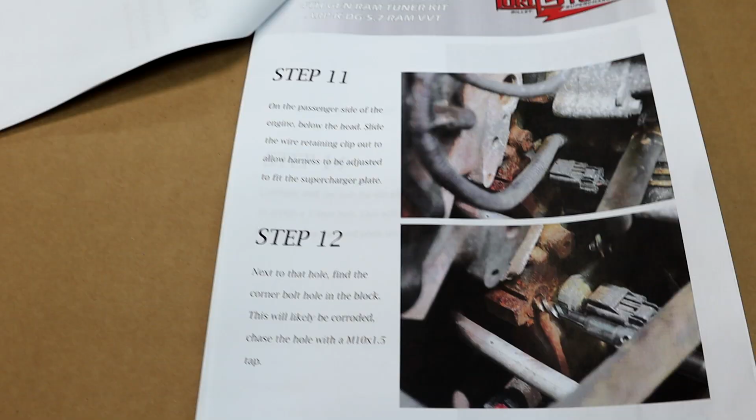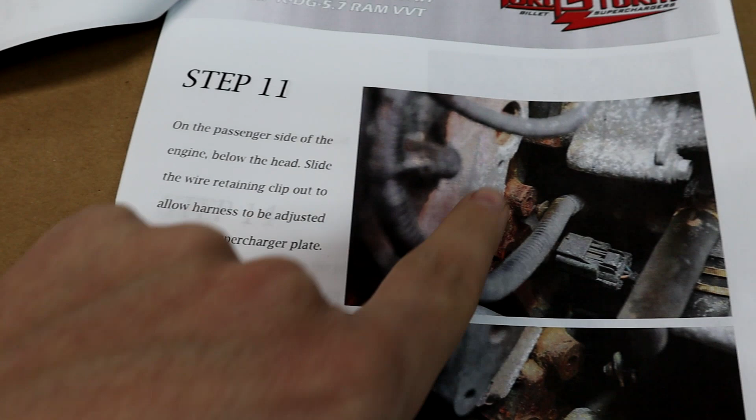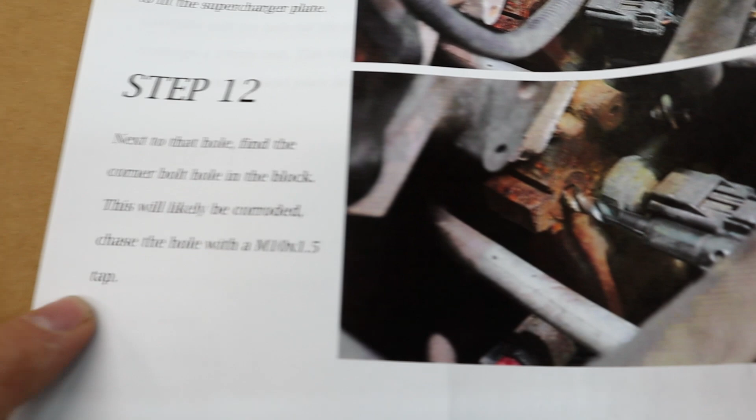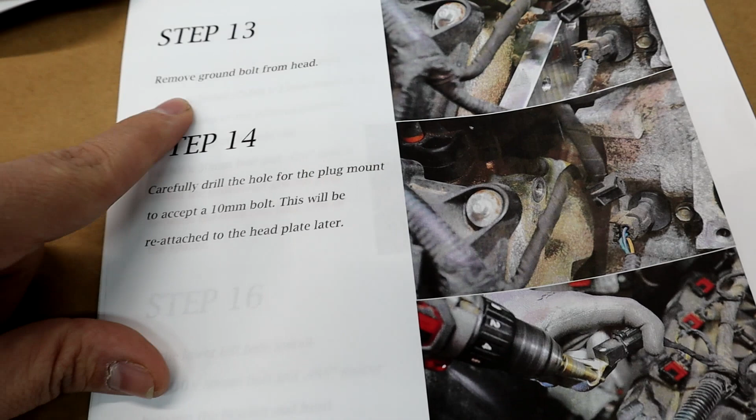All right, guys, so we're back to the TorqStorm install instructions, and we are at step number 11. And what they want us to do is pull this wire clip out of the head or the block, little retaining clip. We need to remove that, and then if you got a dirty truck, or possibly if it's up north, you're probably going to have some rust and corrosion in there, and they're recommending that you chase the threads with an M10 1.5 tap just to clean those threads up, because that will be for the bracket hardware we're going to be installing right here. So let's get that wire clip out and then get our bracket that we need.

Alright guys, so we have our wires ready to go for the bracket. The first bracket we got to install, you got to remove these little clips out of the head and the block. And our first bracket is going to go right here on the front side of the cylinder head, and one bolt will go down here to the actual engine block next to the sensor right there you see. So we're going to grab our bracket and hardware.

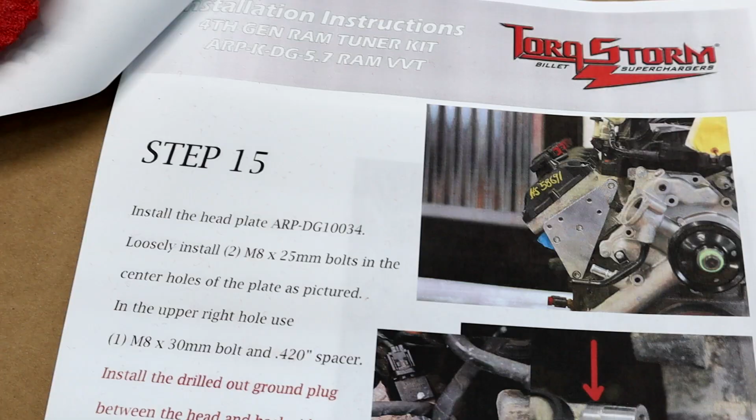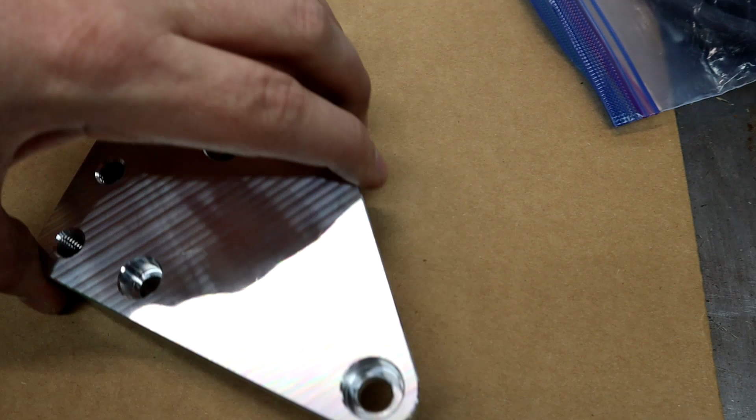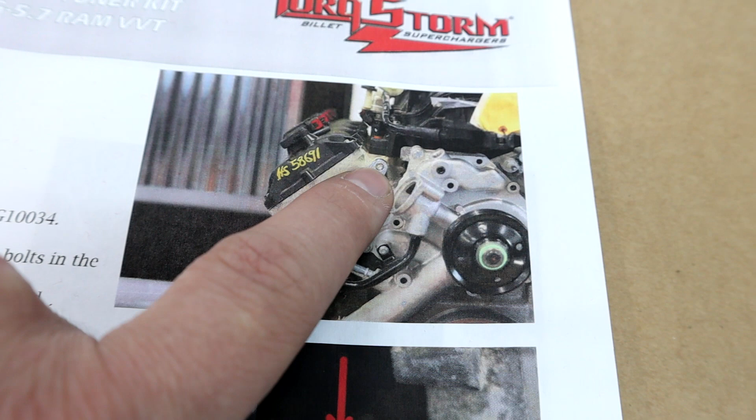Alright, so the next step, guys, is going to be to get the first head plate part number, which is this guy right here. And like I said, TorqStorm actually puts the part number on everything. So that's going to be our first bracket, and it's going to install right here on the cylinder head with hardware, and then down here on the engine block with another bolt. And then there's a spacer that goes in the top of the bracket, and then a spacer that goes on the bottom of the bracket for each bolt.

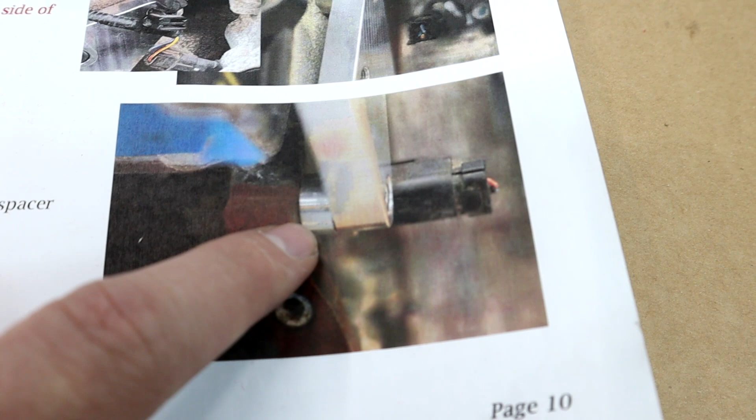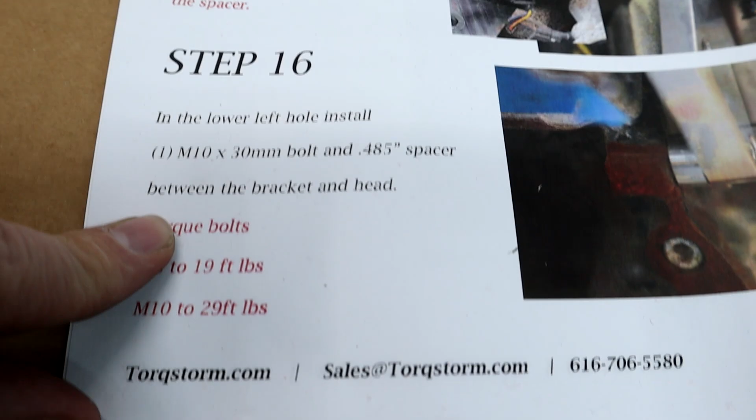The spacers are different sizes or thicknesses, as you can see. The thinner one goes at the top, and the thicker one goes at the bottom, which they tell you right here in the instructions. So very simple. And that's what we're going to do next. We're going to get this bracket installed and some hardware on it.

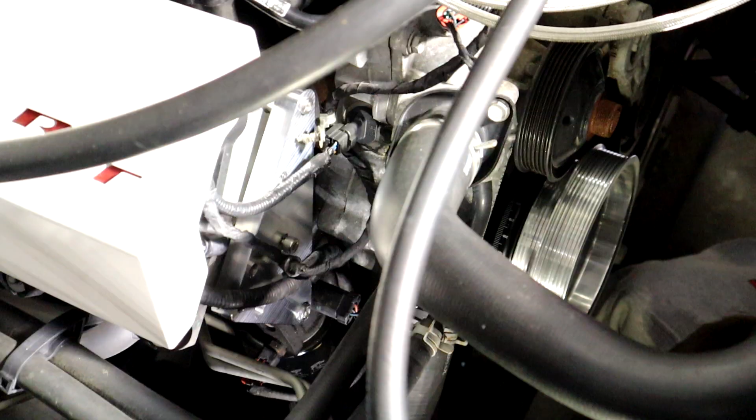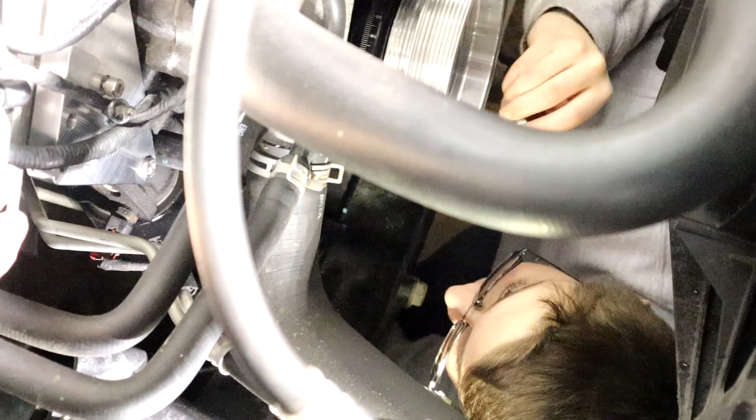Alright guys, so we have our first bracket put on the head, and there's 4 bolts. There's one at the top here that gets a spacer behind it. There's 2 smaller ones here in the middle, which we still got to put one more in, and then there's one at the bottom that also has a spacer behind it that goes to the actual engine block. Junior's down here in the hole. He's about to put the last bolt that holds that bracket on right there in the middle. And then we got to torque these guys down.

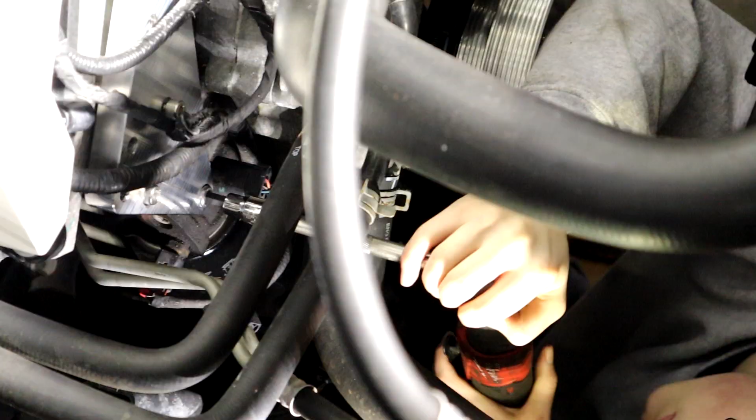You said that was an 8mm? The bottom one, yeah. Alright, so we're about to tighten up the first lower bolt, guys, and it is an 8mm Allen head. And Junior's about to run it down, get it snugged up a little bit. Go ahead. Alright. Then we're going to get these smaller ones, and those are, I believe, a 6mm. Alright, let's get these middle ones tightened up.

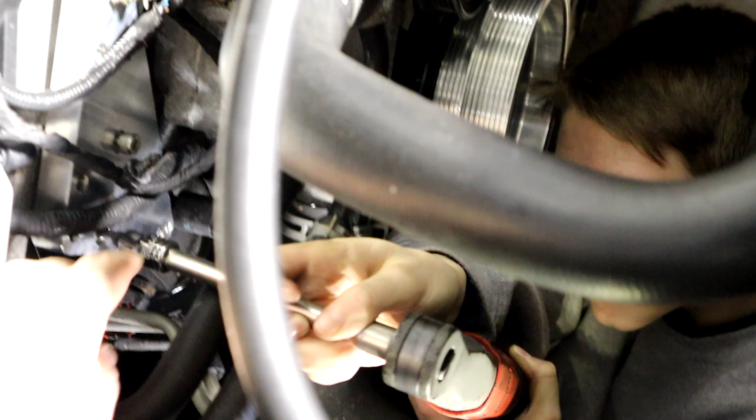Cool beans. Get that other one right here there, Mr. Guy. Oh, there we go. Right there. See it? Here, I'll put you on it. There you go. I can't see it.

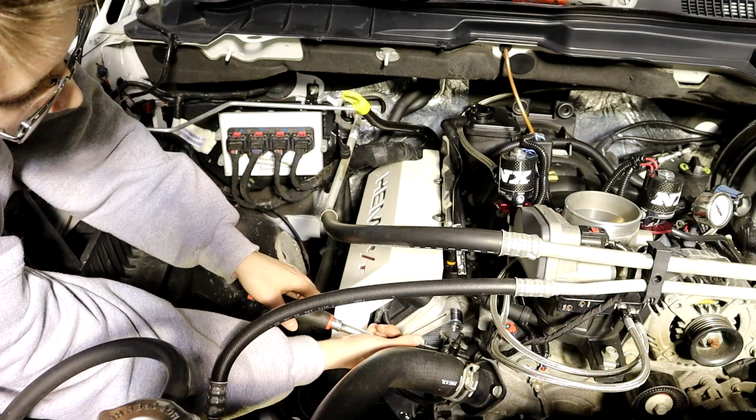Okay. We got her. Now we got one bolt at the top right here that we are going to have to use with a ratchet because there's not enough room between the radiator hose and that bolt. Alright, now we're going to tighten up the top bolt with a ratchet. Little man's going to go to town on that bolt.

I like this job. It's easier to just film it and let someone else do all the work. How much am I getting paid? How much are you getting paid? Yeah, what's my cut? Approximately a Chick-fil-A lunch, baby. That's how much you're getting paid. Easy.

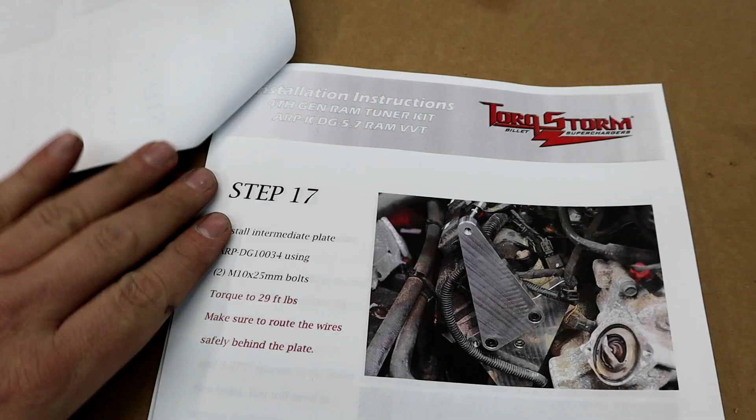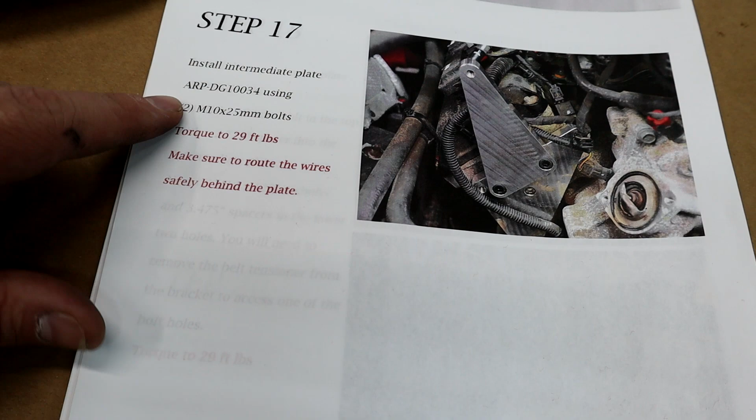Oh yeah, torque it down. Alright guys, we are back to the TorqStorm installation instructions. We're at step 17. We need to install another intermediate plate bracket with two M10 by 25 bolts, and this is going to bolt to the first bracket that we already installed right here. Just 2 bolts, and that is the bracket we're going to be putting on right here. So let's get this guy on.

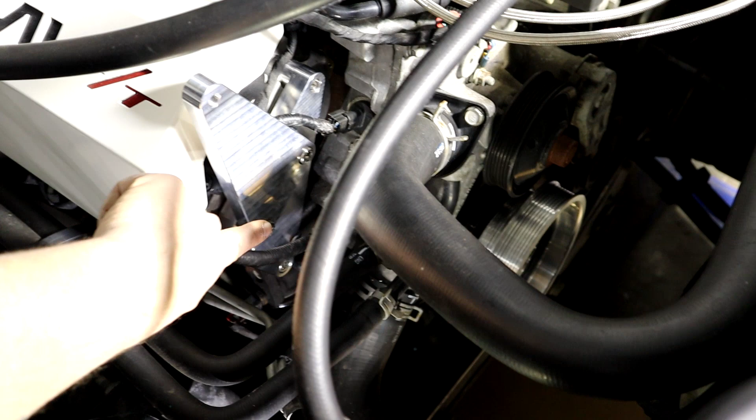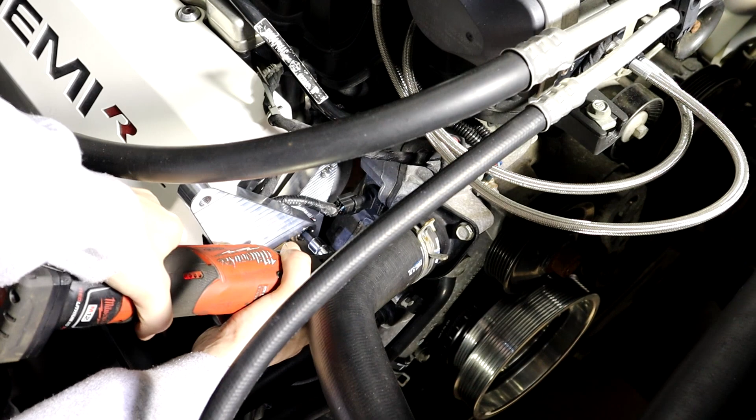Alright guys, so we have our second intermediate bracket bolted to the first bracket we installed. We got the bolts just lightly threaded in, and we're about to have little guy here tighten them up with the ratchet. But they just go like that, and then the wires, you have to be careful to route them around the back without getting them pinched. Other than that, this part's pretty simple, so tighten them up, bro. Alright, get that bottom one.

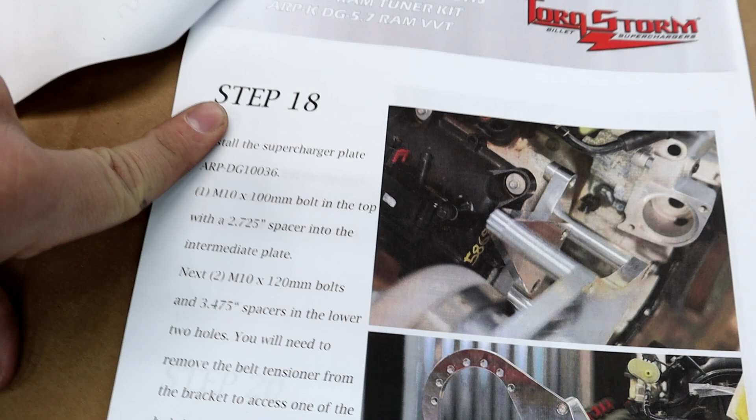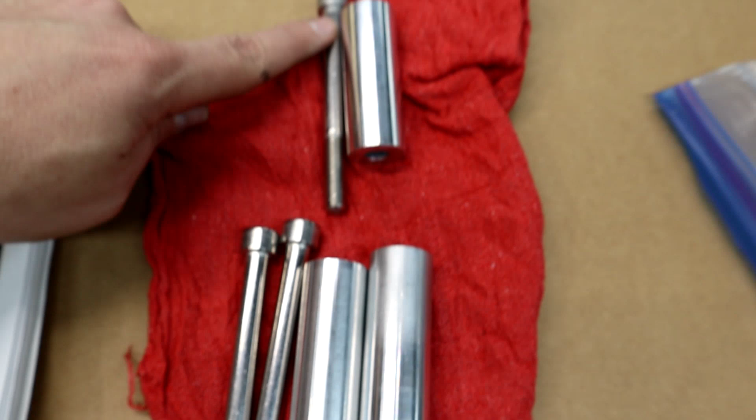Alright guys, so now we are at step 18. We are getting very close to putting on the supercharger. So we are going to be installing the main bracket, some spacers, and some more hardware. And that's what it's going to look like right here. And here's the hardware. This is going to be for the top. This is going to be for the lower section of the bracket. And then this over here is going to be our main bracket, this big guy.

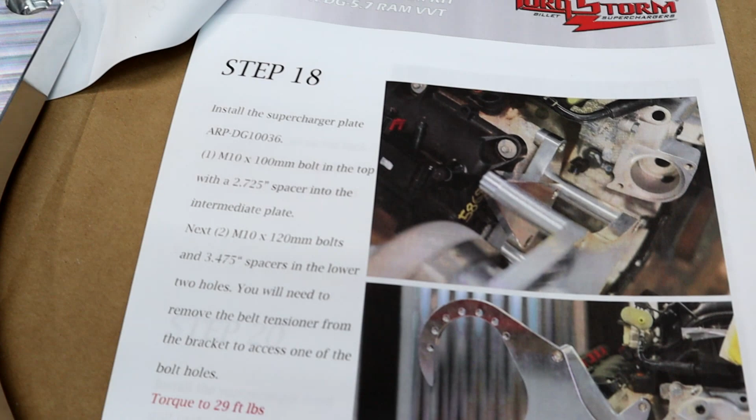And per the instructions, you do have to remove the tensioner that they already have assembled to this bracket, due to there's a bolt hole that you're going to need to get to mount the bracket to the truck. And then once the bracket is mounted to the truck, then you will reinstall this tensioner back to the main bracket. Other than that, the instructions are super clear, nice pictures, letting you know exactly how it's going to go, what to torque it to, the actual size of the bolts and spacers, everything. Very simple. So we're going to get this tensioner unbolted real quick and get to putting this bracket on the truck.

Alright, so we got big bracket here, got our tensioner. Little guy's about to break the bolt loose here. It is a 15 millimeter, I believe. Yeah, 15 millimeter nut. We're going to loosen and take it off. There we go. One nut is off. Then we're going to pull our bracket off the tensioner, and there we go. So we're going to go bolt on this main bracket after we hit him in the head with it, guys. And then we'll put the tensioner back on, and we're getting real close to the head unit.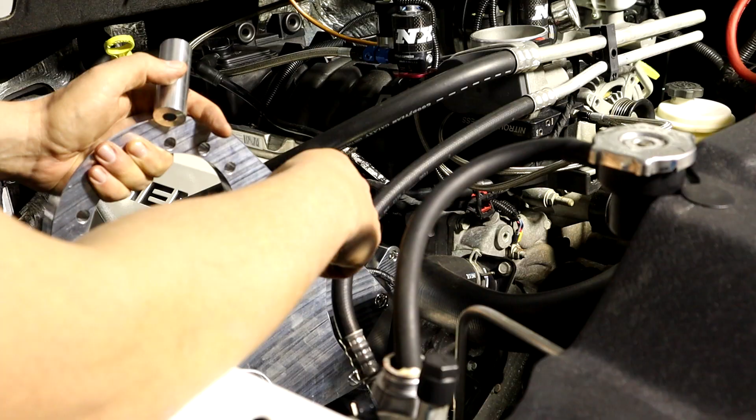Alright, so we're going to get this first bracket mounted up, and the first hole is going to go to the top hole on the first bracket that we installed, and the lower holes will go to the very first bracket we installed on the engine. So you'll use that top upper bolt and one spacer. So I'm going to slide this through the top. The spacer will go on, and then we will fish this into that top section here. There's some lower hoses down there that run to your heater core. That is kind of in the way, you got to finagle around.

There we go, we got that hand tight, and we're going to get little guy under the truck, and he's going to help hold this bracket around and get the lower spacers and bolts threaded in down there. So let's get to it. Yep, that one was there, and here's that bolt there, dude. Yeah. And it is going to go right here in the very corner of that first bracket we installed. Baby, she looking shiny.

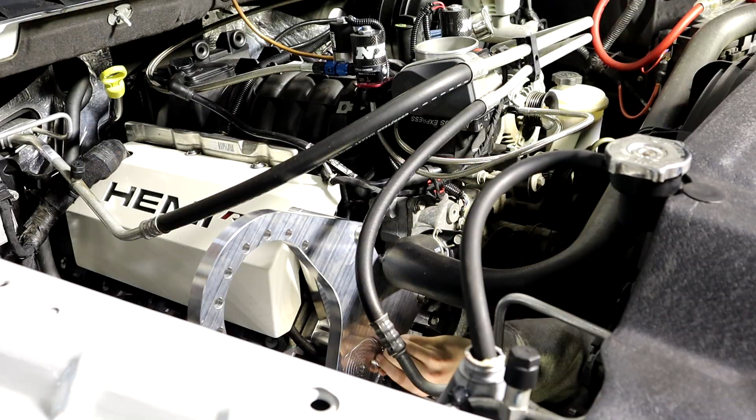Alright guys, we are about to tighten down these 3 bolts for the main bracket here. Let her rip, tater chip. Alright, hit that bottom one down there next to where the tensioner goes. And the one back there underneath the thermostat hose. There you go.

Bam! Alright guys, so the next step is to reinstall our tensioner pulley assembly back onto the main bracket. There is a little dowel pin right here, if you can see it, made into the back of this tensioner, and there is a special hole drilled in the plate of the bracket right here for that pin to go into. So you want to make sure you get that pin inserted in the hole correctly, and we're gonna drop this guy in right here. And we got our helper underneath the truck. He's going to hold that for us, Mr. Helper. And then I'm going to start threading the nut on the back. And we're going to grab our tool.

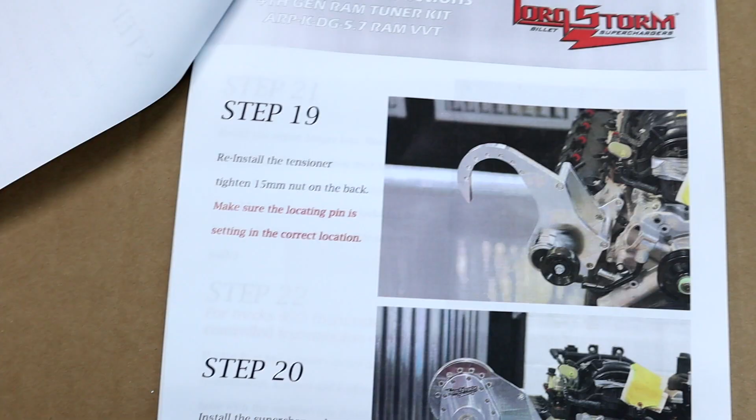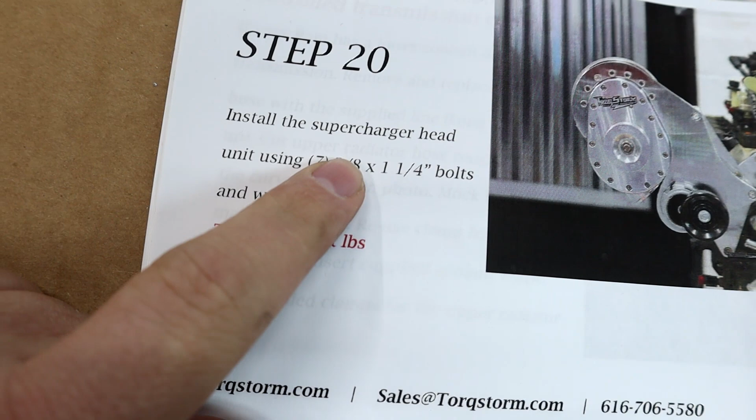Alright guys, so we are done with step number 19, which was putting on the main supercharger head unit bracket. We are to step 20 now, and guess what that is? Install the supercharger head unit, baby. So we're going to be installing the TorqStorm Supercharger onto the main bracket. We're going to get 7 3/8 bolts and washers and torque it down. So that's the next step.

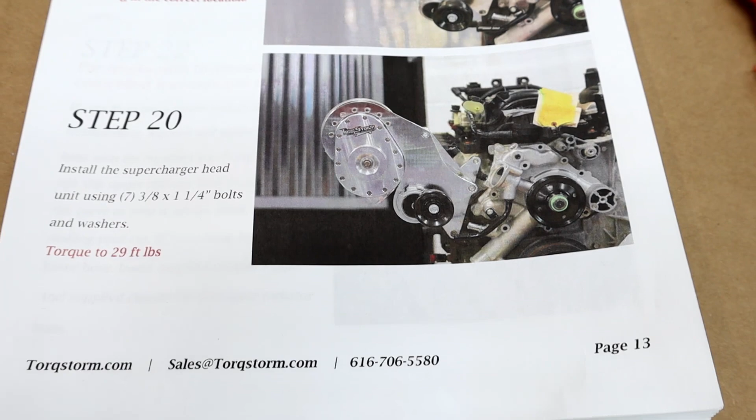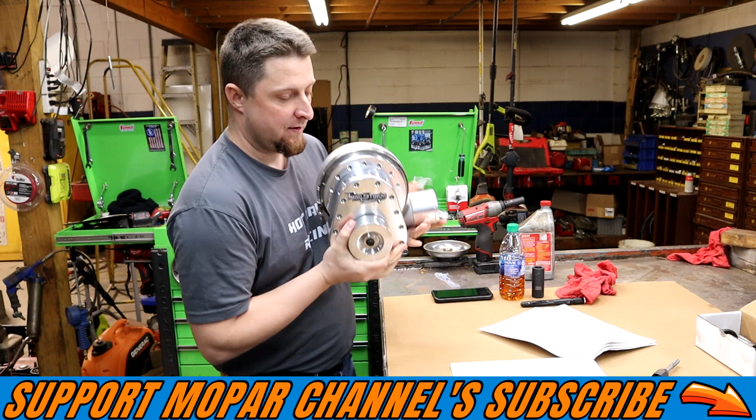Alright guys, so here it is. Time to put the TorqStorm head unit onto the main bracket. Finally get to put the actual supercharger on. I'm excited. What do you think about this guy? Come here and just hold. Just come and hold the power. Just see what you think about this power right there. I mean, what is that? Does that not just make you feel more powerful?

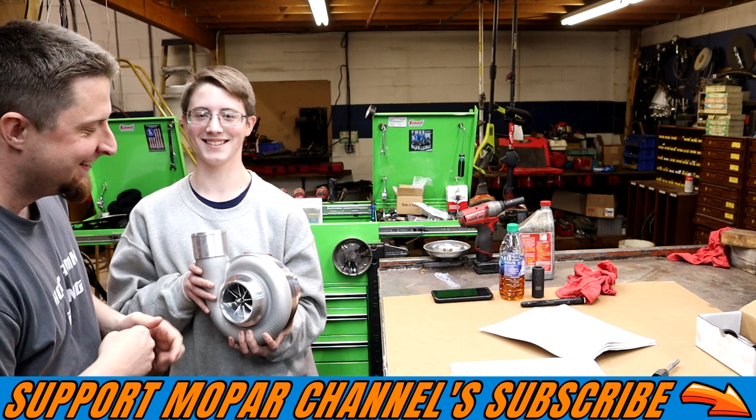Buy yours now. TorqStorm.com. Like you can breathe better almost. It's just that badass, isn't it? This guy's a salesman. Buy yours now.

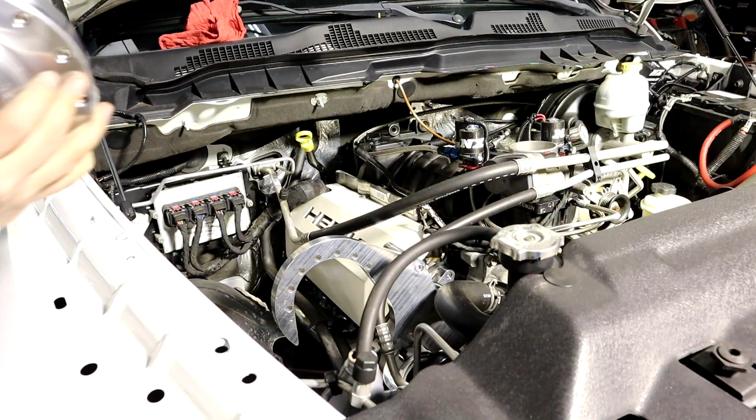Alright guys, we are about to drop in the TorqStorm Supercharger. So here we go. One bolt, sir. More.

All right, I'm just going to put these 3 bolts in for right now. There is 7 that you're supposed to put in to hold it on. I'm going to put 3 for now and just snug these up until we get everything completely done, in case we end up having to take the supercharger back out to work with the intercooler tubing or anything like that. So I'm going to put 3 bolts in for now, but we will put all of them in later.

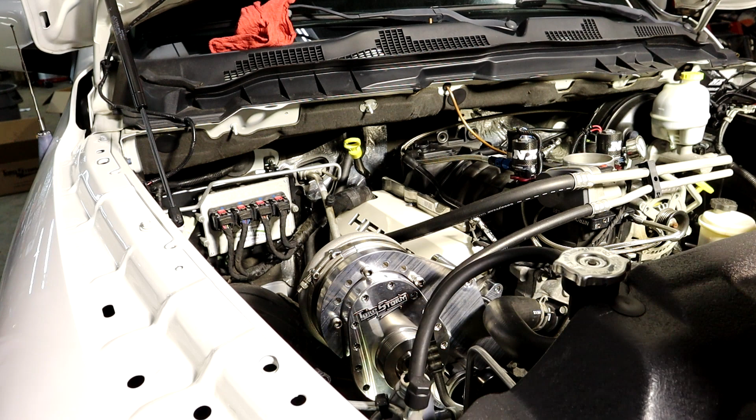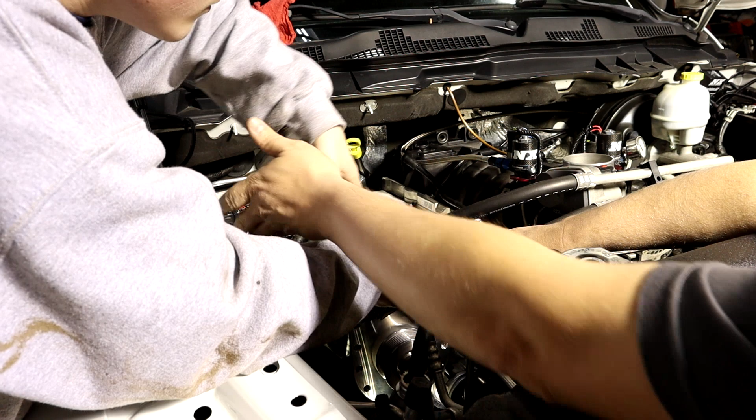All right, we're going to let little man snug those things down with the little battery ratchet here. Uh-oh. That's fine. And hit the other one up there in the front. Hold the back of your tool right there and it'll keep it from swinging down on you. There you go. Yeah, dog. Bam diggity.

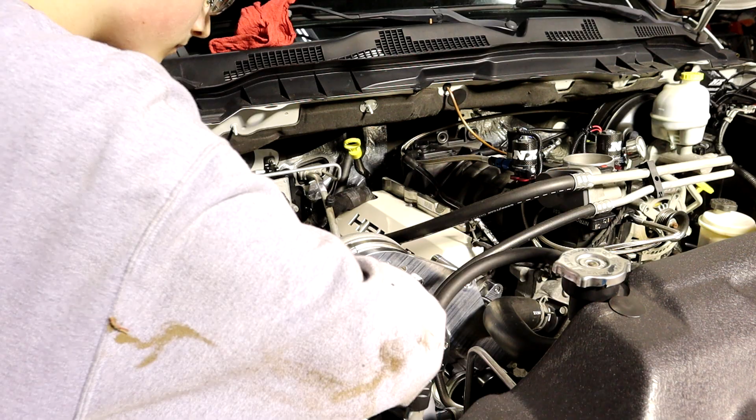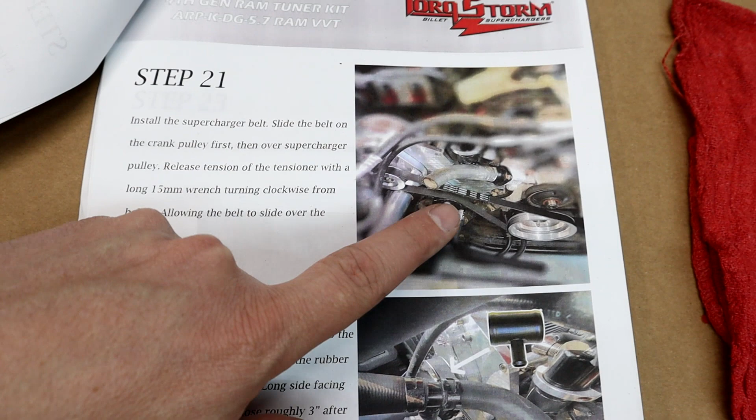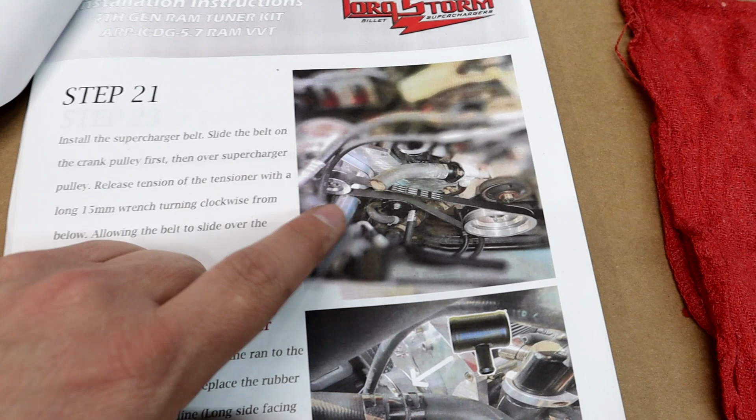All right, guys. Got the supercharger head unit mounted on. Next step is 21, and we are going to be installing the supercharger belt now. Now, keep in mind, the factory engine belt that runs all your accessories, alternator, whatnot, that belt actually has to be installed first because it is going to be behind the supercharger belt. That's not listed in here, so you will need to install your factory belt first and then install the supercharger belt, and then you're good to go. So next step, we're going to put our belts on.

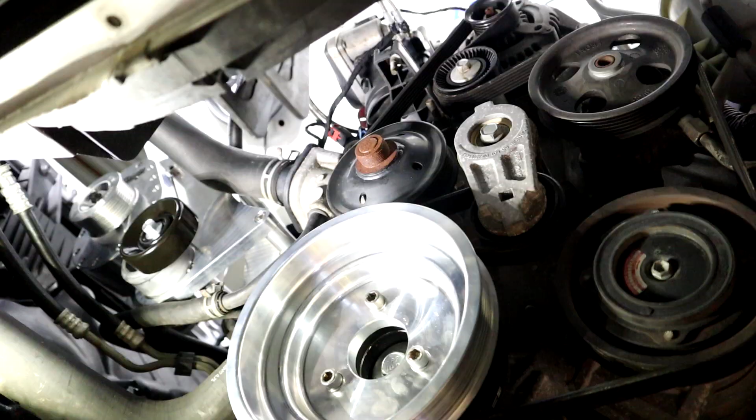All right, guys, so it's time to put the supercharger belt on. We have our factory belt installed already, as you can see. This is a very simple belt to put on for the TorqStorm Supercharger belt. And again, I do want to point out that this pulley system for the supercharger and the belt is an 8-rib drive belt pulley setup. The ProCharger kit is a 6-rib kit like your factory belt, so it's skinnier and they're prone to slipping. The TorqStorm kit is an 8-rib setup, so the belt is thicker and it has more material to grab a hold of on the new pulleys.

Also, the tensioner setup on the TorqStorm, as you can see, has an actual tensioner. And you can see that is me moving the tensioner. It works and functions just like the factory tensioner does. So it always has pressure that's spring loaded, applying that pressure to the belt to keep it tight and from slipping. Now in the ProCharger kit, I do believe the tensioner setup on them is kind of a little bit janky, and it's more of like a threaded rod and a nut that you have to adjust to get a certain amount of belt tension per their measurements. Not the case with this setup. This drive system with the TorqStorm runs a real tensioner with a thicker belt and bigger pulleys. So it's going to get a good belt grab and it should not do any slipping whatsoever.